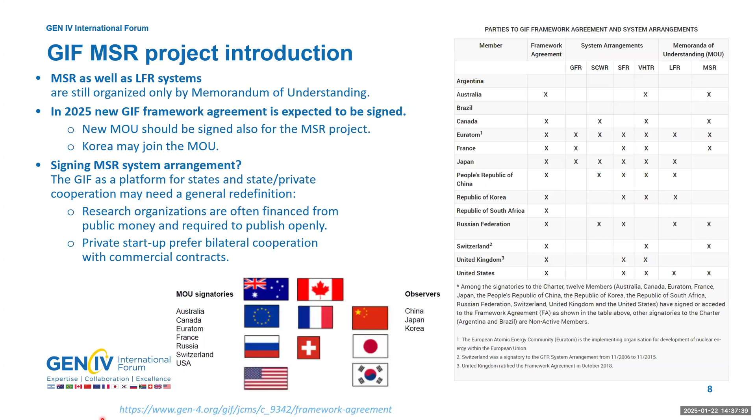Historically, we have discussed several times the option to sign an MSR system arrangement. So far it has failed for different reasons, and it's a question nowadays whether the GIF platform, as a state and state-private cooperation, may itself need redefinition in how it's organized, because there are research organizations financed from public money and required to publish openly, while private startups prefer bilateral cooperation with commercial contracts.

So GIF itself is looking a bit for its position, and MSR probably may wait for the decision to sign the system arrangement. The major activity of GIF is a biannual project meeting, typically held once online and once in person nowadays, but we are planning to switch back to both meetings in person.

We are contributing to the GIF annual report, and together with the PRPP working group, we recently published the MSR PRPP white paper about proliferation resistance and physical protection. Together with the risk and safety working group, we are trying to finish the MSR white paper on system safety assessment.

We are also representing the GIF MSR project at IAEA technical meetings. We don't have explicit interaction with NEA OECD, but as you may know, NEA acts as the Secretariat for Generation 4 International Forum, so it is also Secretariat for the GIF MSR project. I'd like to mention that the Working Party on Scientific Issues of Reactor Systems prepared the FHR benchmark, so if you're interested you can contact them. And the International Reactor Physics Experimental Evaluation Project included the MSRE case in the Handbook of Critical Experiments.

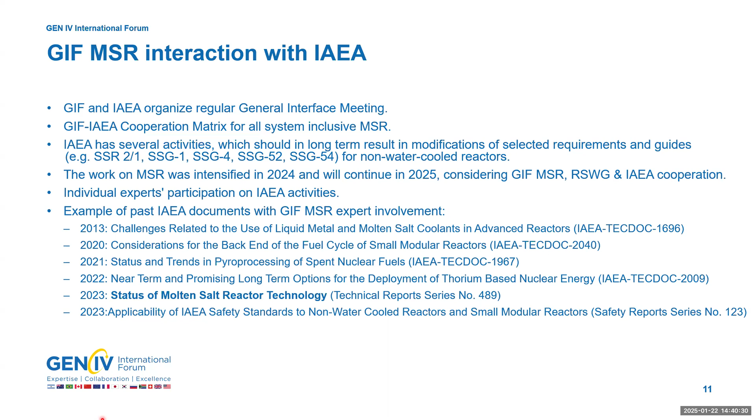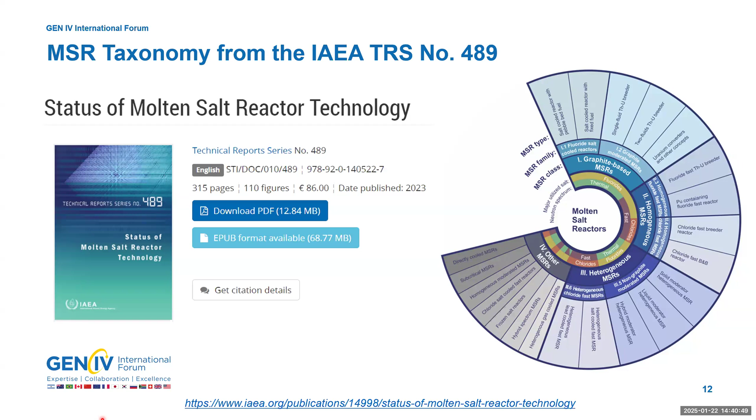This document includes the molten salt reactor taxonomy, which we've been developing at IAEA. I presented this taxonomy a bit in my previous webinar, but I'd like to go into details this time, focusing on the development of the taxonomy itself to justify which decisions we made at that time. So let me spend a few slides on that.

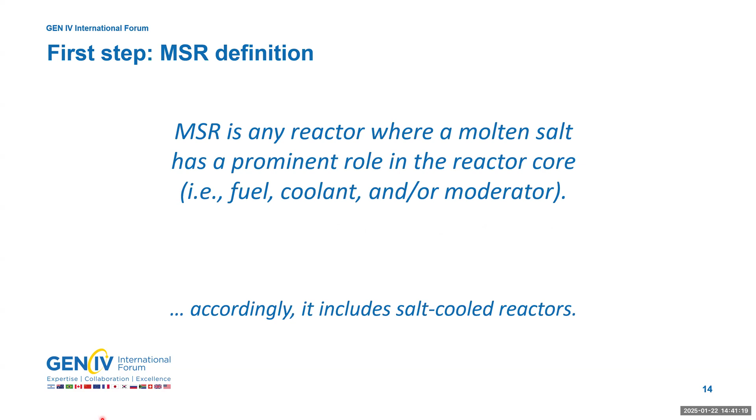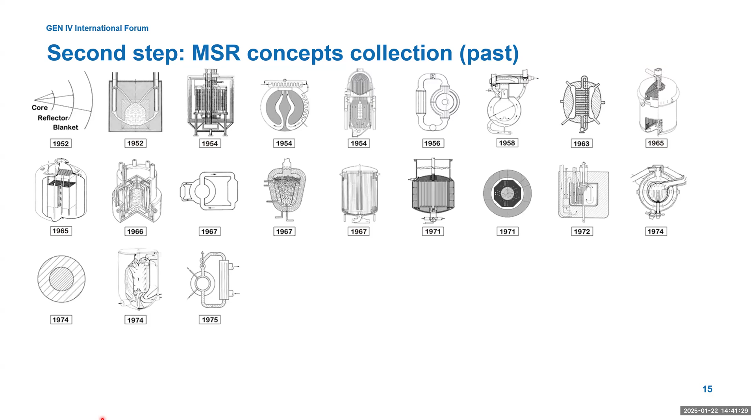The first step was the definition of MSR, chosen so that salt-cooled reactors were included in the taxonomy, because salt has a prominent role in their core. The second step was looking at MSR concepts from the past — we tried to collect all the possible concepts imaginable — and then we looked at more recent concepts, limited by the year 2020, since the report was released around that time.

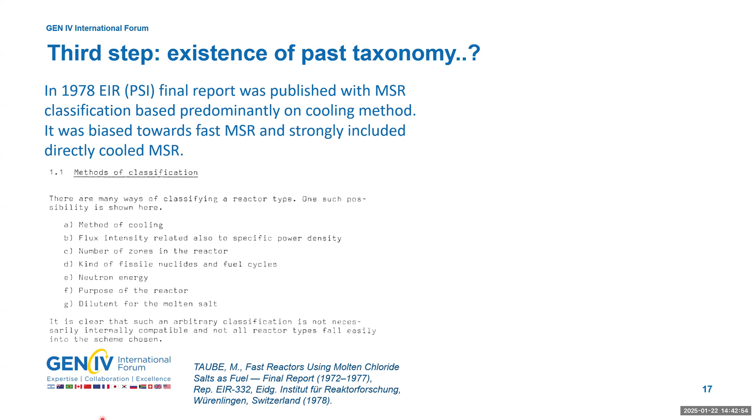The third step was looking at whether there was a past taxonomy, and indeed there was something you could call one: a method of classification from 1978 from the predecessor of PSI, Professor Taube and his team, who in the final report of their project tried to classify MSRs. The classification parameters included, first, the method of cooling, since at that time molten salt reactors with direct cooling — where, for instance, lead passes through the core, directly mixing with the salt and leaving again — were popular. Second was flux intensity or power, third was number of zones, fifth was neutron spectrum, and fissile nuclide and fuel salt type was not among the top three. So it was really based on cooling methods and number of zones.

For the IAEA taxonomy, the first meeting took place in 2016, quite some time ago. There are many parameters to consider, and thousands of options for how you could organize such a taxonomy, and even the one we selected isn't written in stone, so it can easily change in the future. But our first choice was that the taxonomy is limited to large reactors, because molten salt reactors provide such design freedom that you are, to a certain extent, limited only by heat exchange.

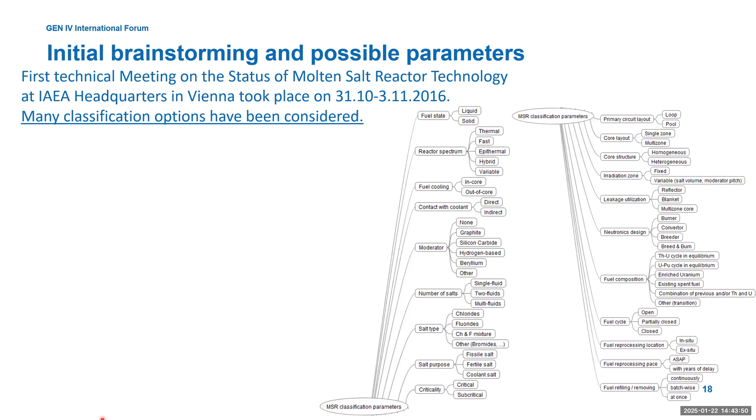And if you go to low powers, where even the heat exchange is not limiting, you can have thousands of designs. So the taxonomy was for large reactors, and the neutron spectrum, even though it's tempting, was not selected as the highest rank criteria. The fuel cycle type or salt type itself was also not selected. So finally, the number of major materials in the reactor core was selected as the highest rank criteria.

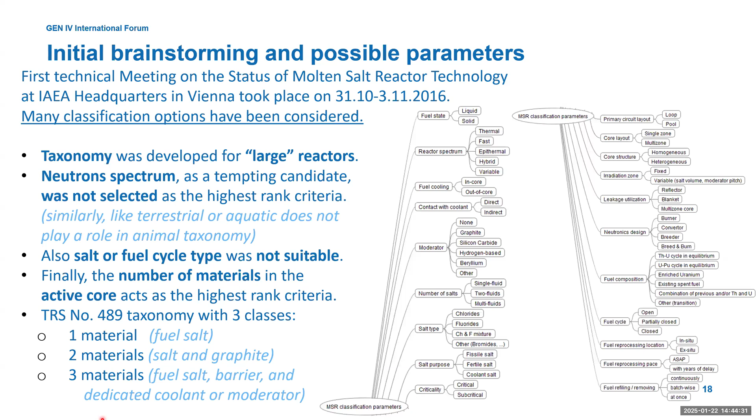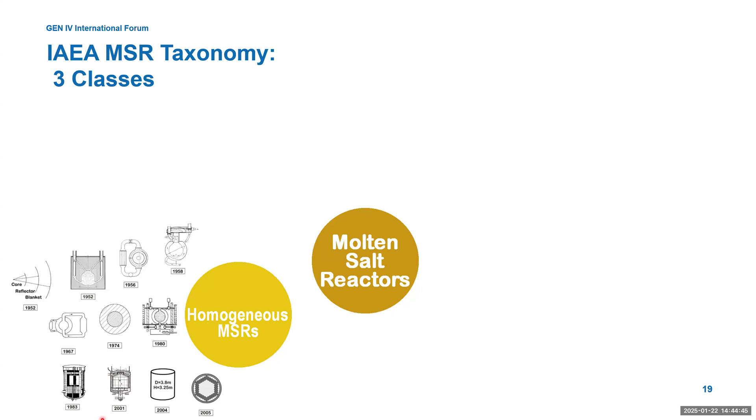So you have a class with one material in the core, which is the fuel salt; with two materials, which is salt and graphite; and three materials: fuel salt, a barrier material, and then a dedicated coolant or moderator. Molten salt reactors can be divided into homogeneous MSRs, where typically chloride and fluoride fast reactors belong, graphite-based MSRs, where graphite is used in the core, and heterogeneous MSRs, where a structural material separates fuel salt from either a dedicated coolant or solid or liquid moderator.

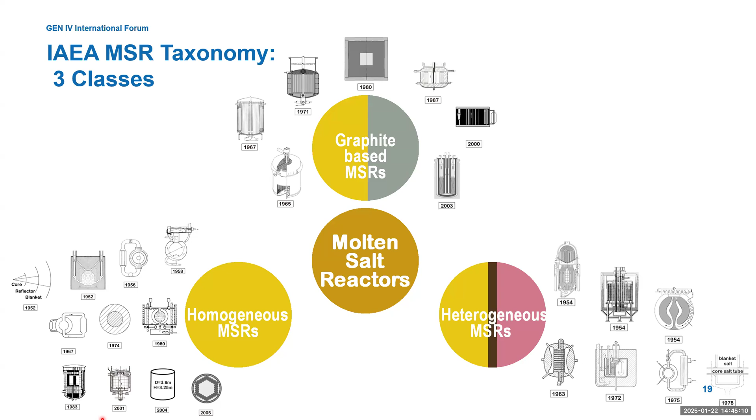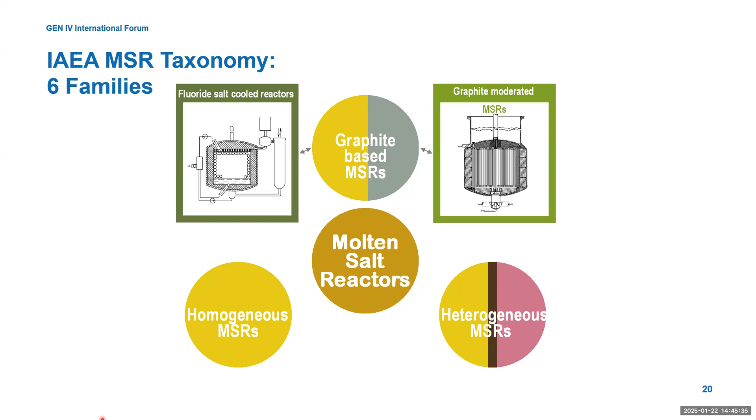These three classes can be further subdivided. For graphite-based MSRs, it is into fluoride salt cooled reactors, where the salt has only a cooling function and the fuel is embedded in TRISO particles in the graphite, and graphite moderated MSRs, where the graphite acts as a moderator and the fuel is dissolved in the salt. Homogeneous MSRs can be divided into fluoride fast MSRs and chloride fast MSRs, and heterogeneous MSRs into non-graphite moderated MSRs and heterogeneous chloride fast MSRs.

In the GIF MSR project, we adopted the IAEA taxonomy, and here you can see the graphical form we use in the GIF annual report, and this is a list of companies or concepts provided by the GIF MSR project partners. So it's not an exhaustive list — some concepts may be missing, but it is what the partners provided.

So this was a relatively short introduction of the decisions we made when creating the taxonomy. Now I would like to have a look at the history of MSR and comment a little bit on the evolution of ideas and concepts.

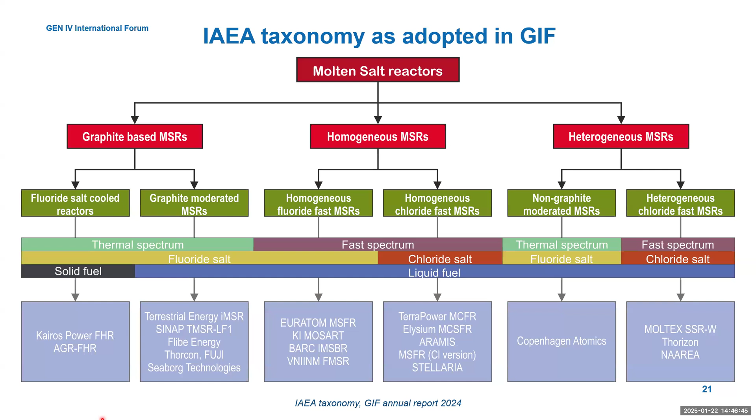As you may know, it all started with the aircraft nuclear propulsion program. It was the first big program dedicated to MSR, not only MSR, but quite intensively to MSR, and it was meant for aircraft propulsion. Therefore, fast reactors have been excluded. And since it required high temperature, water as a coolant was also excluded.

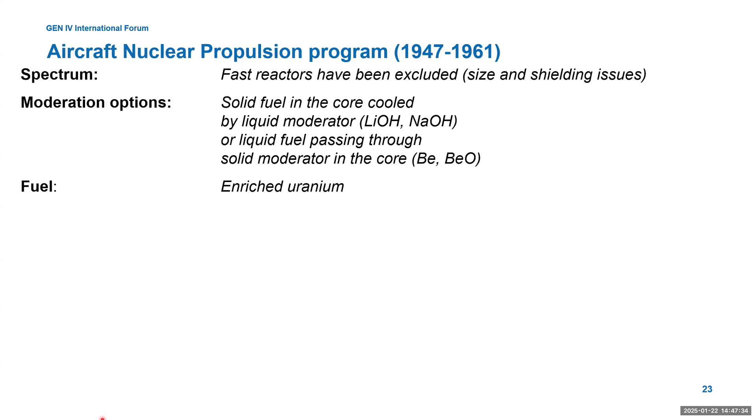So there were basically two options: solid fuel cooled by liquid moderator at high temperature, let's say lithium or sodium hydroxide, or liquid fuel passing through a solid moderator, such as beryllium or beryllium oxide. It was relying on enriched uranium, and Oak Ridge, as the project's main institution, looked at many, or practically all, possible uranium compounds to see if they were useful for the reactor.

And ended up with uranium fluoride diluted in fluoride carrier salt. The issues they had at that time are very similar to the issues we have now with engineering: minimizing the melting temperature of the salt, compatibility of the salt with other materials, and minimizing the core and shielding size and weight.

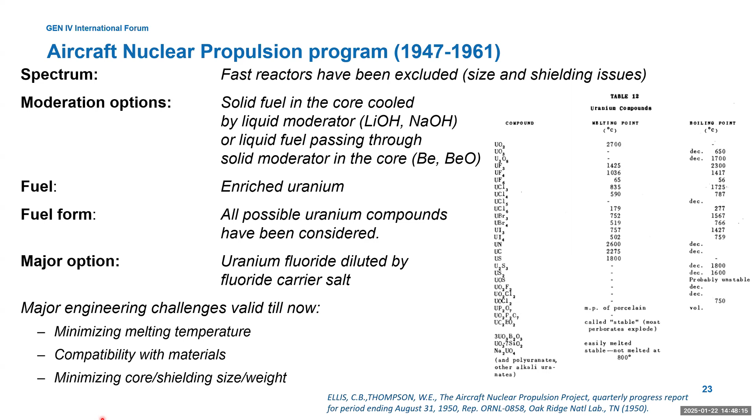So I will now go through the decades of evolution, starting with the 1950s — the early Oak Ridge MSR pioneering time. There was an ongoing military project, but in parallel there were also students looking at fast chloride and fluoride breeders. They were probably faster in publishing because they likely had deadlines and wanted to be ready with their studies.

So in 1952, two reports were published — one for the chloride fast MSR and another for the fluoride fast MSR. Already from the first report, it is obvious that chloride fast reactors have an issue with neutron leakage, which needed to be handled with a reflector and blanket. For the fluoride fast breeder, you can see it used graphite as a reflector, and there was beryllium in the salt, so it was not really a fast reactor, and the breeding performance was so weak that this branch was kind of abandoned to a certain extent.

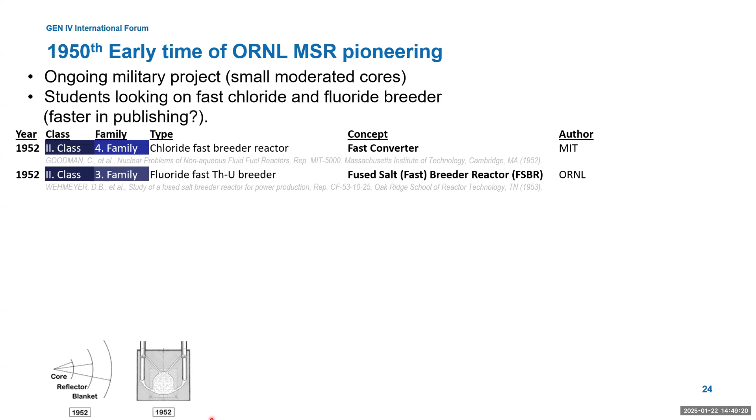In 1954, there was a report which included the ARE, the famous experiment with beryllium oxide and salt. There was the Fireball, a kind of conceptual idea of how the aircraft propulsion could look, but there was also a heavy water moderated concept, an ART concept variation.

Later in the 50s, two other designs for chloride and fluoride fast reactors were published. They were a little more mature compared to the initial ones, and especially for the fluoride fast reactor, you can see that the graphite reflector was abandoned, but there was still beryllium in the fuel salt.

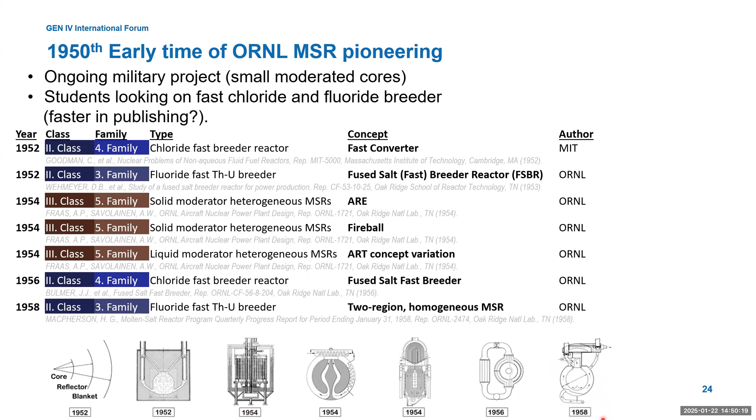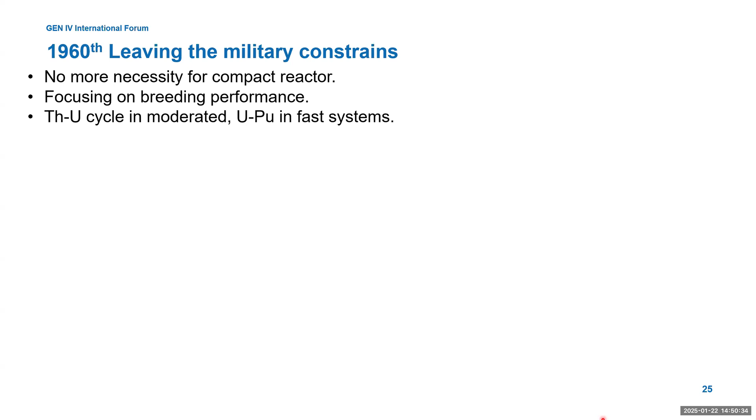So still the spectrum was quite soft, and the breeding performance was not really breathtaking. In the 60s, Oak Ridge was leaving the military constraints, so there was no more necessity for a compact reactor. And there were two branches: thorium breeding cycle in moderated MSR, and uranium-plutonium cycle in fast systems. So here you can already see quite a mixture of different concepts.

In 1963, the first heterogeneous chloride fast reactor was proposed, with the idea that if you separate the fuel from the coolant, you don't need to extensively pump the fuel.

In the same year, in Oak Ridge, the two-fluids MSBR version was proposed. This was later abandoned because of the difficulty of separating the two fluids.

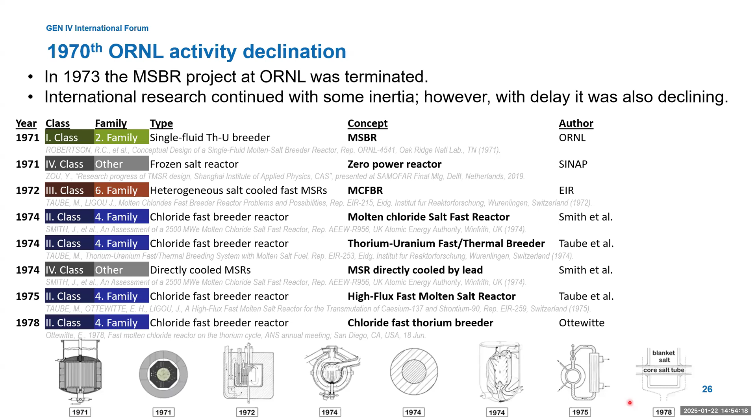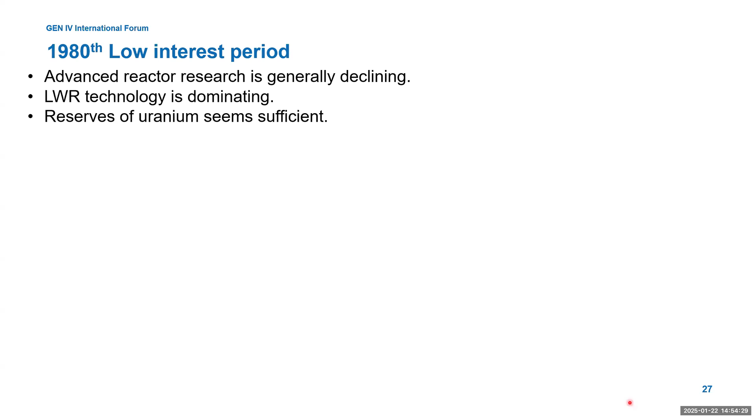Unfortunately, in the 80s, it was a low interest period. LWR technology was dominating, and it seemed that uranium reserves were sufficient. So those are like last-of-a-kind designs. In 1980, the last design from Switzerland was a chloride fast reactor which had a particularly liquid salt reflector.

In Oak Ridge, they tried to propose the denaturated MSR, DMSR, with the idea that by giving up the breeding, you can change the fuel cycle, denaturate it so that you avoid proliferation risk, and make it so big that the graphite lifetime would be 30 years, similar to the lifetime of the vessel.

But it was also a kind of last-of-a-kind, and research was stopped in Oak Ridge after. 1983, the Russians proposed a salt-cooled pebble bed reactor, and in the same year in France there was probably the last directly cooled MSR proposal. The Japanese were holding the flag of graphite-moderated MSRs in the late 80s with the Fuji concept.

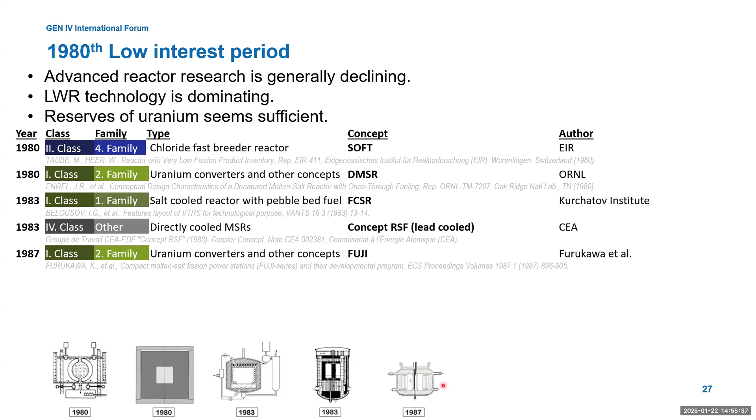In the 90s, generally it was a dark period for nuclear energy, and it seemed at the time that ADS, accelerator driven system, was the light at the end of the tunnel. So there were also subcritical molten salt reactors proposed. Generally, the accelerator is very useful if you want to burn minor actinides, and if your core is loaded only with minor actinides, you can have a problem with your Doppler coefficient, and you may need an external neutron source provided by the accelerator.

But molten salt reactors can probably compensate for the weak Doppler through the liquid fuel expansion coefficient, so they don't need this accelerator. Furthermore, ADS is good for a small dedicated burner, but it's not really scalable for energy production, because if you scaled it to big powers or many units, you would really need many large accelerators.

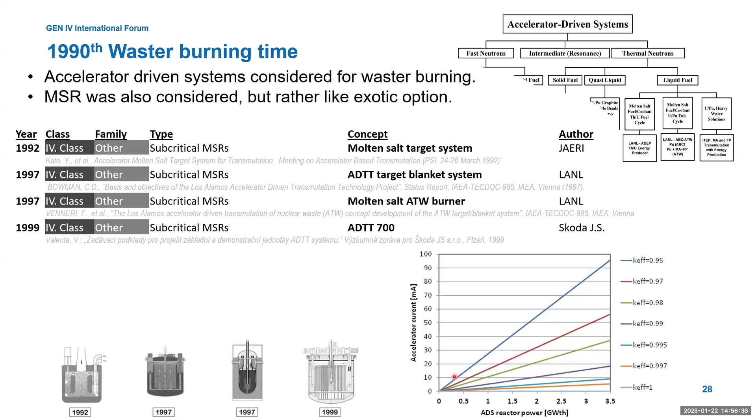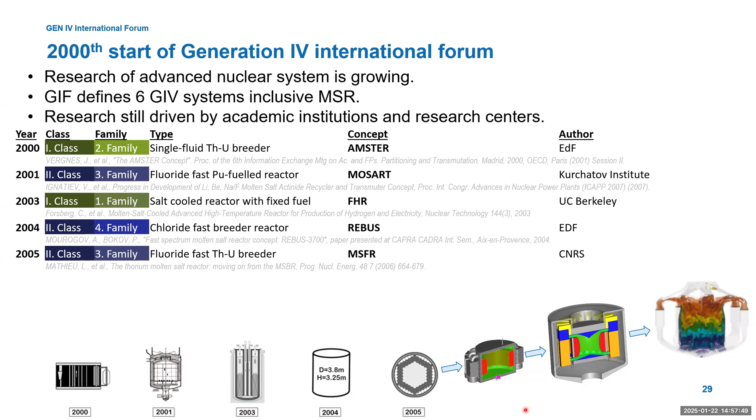What I would like to illustrate here is the evolution of the concept, because probably all of the concepts being developed nowadays undergo such an evolution, but this is not public, so we don't see it. For the MSFR, however, it is well documented how it was evolving.

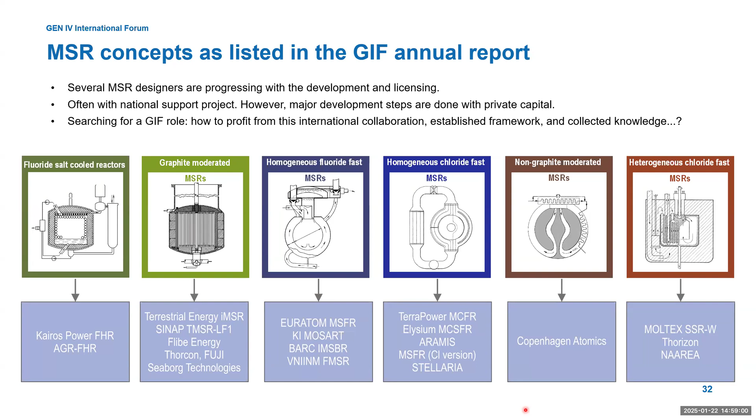Now I would like to open the third part of this presentation, speaking about MSR issues in a nutshell. So first of all, the basic features.

For homogeneous MSRs, you use fluoride or chloride salt, which acts also as a coolant, and it's a fast spectrum. In case of chlorides, the spectrum is very hard, and it's very good for the uranium-plutonium cycle, which can profit from a hard spectrum. At the same time, it is transparent for neutrons, so it can be quite leaky, and you need to handle the leakage somehow.

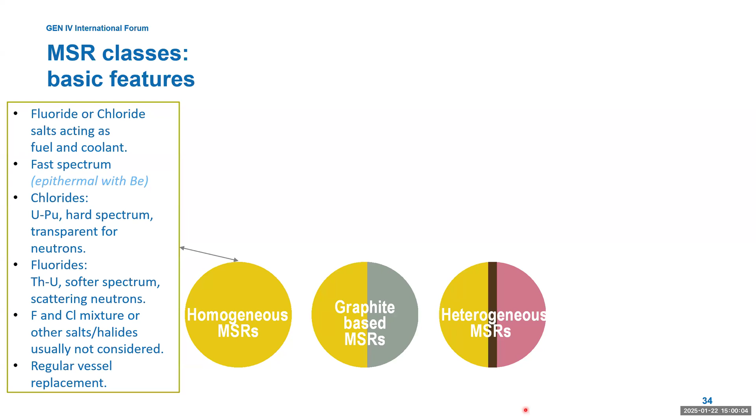You need to have big reactors, or a reflector or blanket. On the other hand, fluorides provide a much softer spectrum, so it's much more suitable for the thorium-uranium cycle, and it can be designed as a more compact system. What you need to do for these reactors is probably replace the vessel regularly, because it is really irradiated—it's very near to the reactor core because it's forming the reactor core.

For graphite-based MSRs, exclusively fluoride salts are used because chlorides would have a high neutron capture. There is a possibility of a closed thorium-uranium cycle, but it would be demanding—you would need fast fuel cleaning in that case. So typically a low enriched uranium fuel cycle is foreseen.

In case of solid fuel, TRISO particles embedded in the graphite matrix, you need moderating salts like lithium fluoride or beryllium difluoride, because only moderating salts provide a negative coolant density effect. And you need to replace the graphite regularly in these reactors.

In heterogeneous MSRs, you have the separating material, and it's kind of eating neutrons—parasitic neutron capture by that material. The choice of this material will determine your neutronic performance, so its breeding capability.

Fluoride salts are used for moderated systems, because you don't want to use chlorides in a thermal spectrum. On the other hand, chloride salts are used in systems with a dedicated coolant, because you need some reactivity excess for the dedicated coolant and the material of choice. Again here, you need regular replacement of the structural material.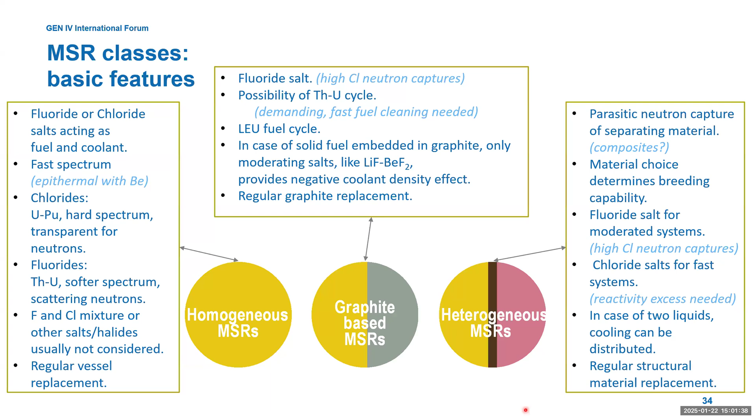Now, all these reactors have one thing in common: the reasonable temperature window for operation, because you have, on one hand, salt melting temperature, and on the other hand, structural material failure temperature or integrity. So you typically have eutectic mixtures of carrier salts and actinide salts so that you lower the melting temperature.

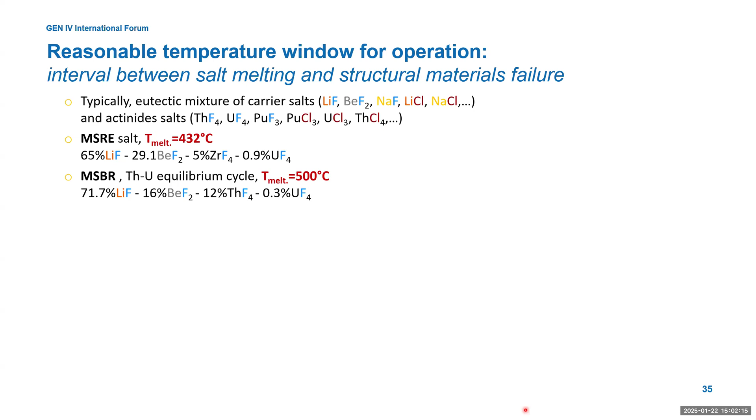The molten salt reactor experiment, for instance, was operated with a salt where the melting temperature was 430 degrees. The MSBR salt with thorium already had a melting temperature around 500 degrees C, so it's quite some step up.

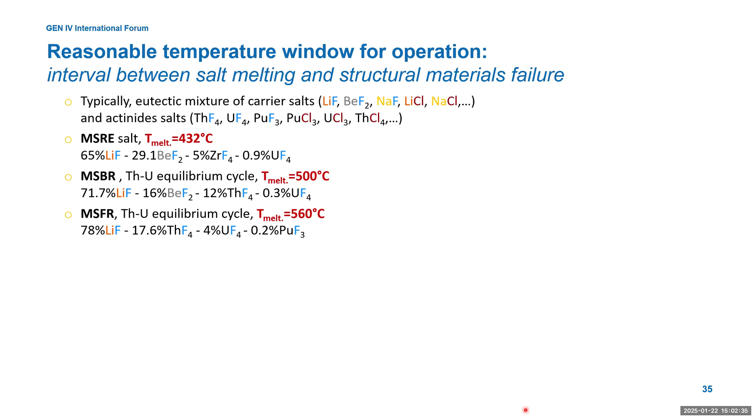MSFR is foreseen to operate in the thorium-uranium fuel cycle, and it has a fast spectrum. So beryllium was removed from the salt, and the melting temperature increased again by 60 degrees C, to 560. If you would like to start this reactor just with plutonium, your melting temperature would be sky-high. Consider that the structural materials probably can be operated up to 700, 750 degrees C.

For chlorides, molten chloride fast reactor, it is back to 560 degrees C. And there is a salt, for instance with thorium and plutonium, which is probably good for waste burning, which has again quite low temperature like we had at MSRE time.

In general, the solubility limits and actinide density are competing with melting temperature, and you need to find an optimum or compromise between these, and also consider the structural materials you are using, and safety features and so on. Similarly, like with temperature window, there is a redox potential window, and there is also a trade-off of salt stability and structural materials corrosion.

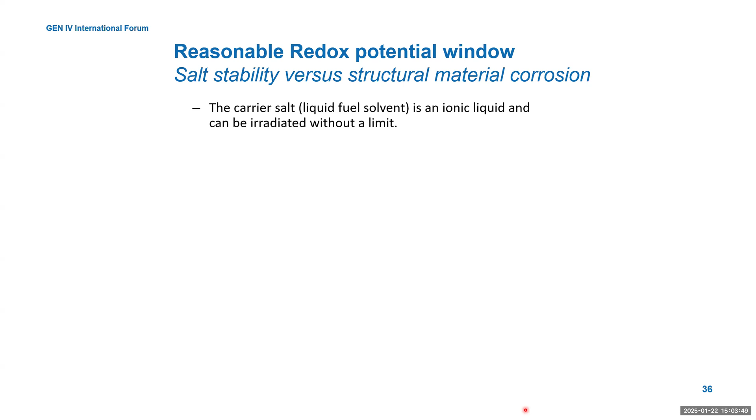So the salt itself is an ionic liquid and can be irradiated for infinite time. And no matter the fuel cycle type, it is always good to keep the actinides as long as possible in the reactor. So what you want to remove is actually the fission products, but they don't want to be removed. They are typically the last one to leave.

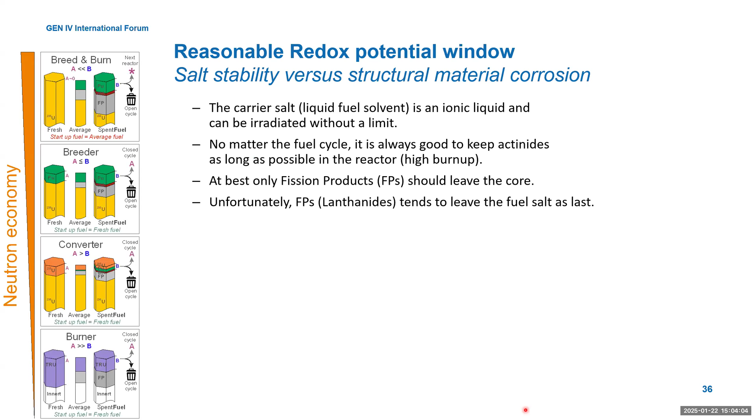And you need to control the salt. You need to control the redox. You need to remove impurities so that you are in a safe redox potential window.

If you would be on the oxidative part, you see that the corrosion or oxidation of the structural material can be quite strong. If you will be on the reductive part, you may have an issue of precipitation of actinides and other elements. So according to your system, your structural material, and the salt and fuel cycle you select, you need to find your redox potential window for operation.

If you would then control this redox, and keep the salt clean, not necessarily are there big issues with corrosion. So there is a temperature window, there is a redox potential window, but you should also consider the fuel cycle type and combine them all together because they should fit.

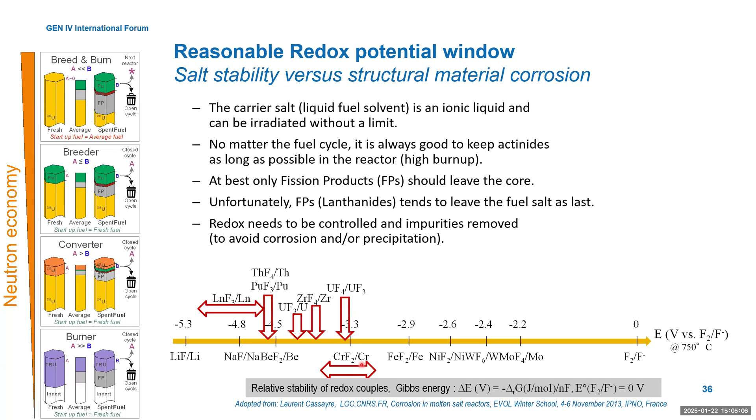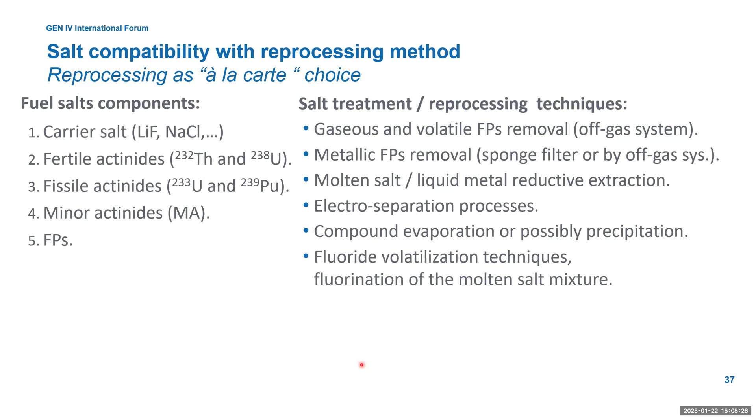So from that perspective, the salt has 5 components, and it is typically only the 5th component, the fission products, which you need to remove. And for that, you can use several different methods. Sometimes you need to use several different methods to get to the fission products and remove them. And you can apply these methods in many different modes, so altogether it provides many different variations.

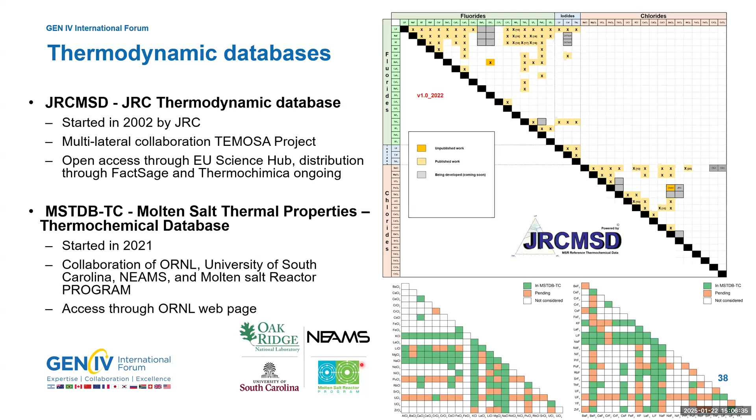The last slide of this part, I wanted to speak a little bit about safety and licensing on a very high level. And I would like to express a rather personal perspective here, that nowadays the light water reactors are based, the core of light water reactors is based on assemblies and pins.

And the core does three major functions. It is the location of the first confinement barrier, it is the location of primary heat exchange, and it is also shaping the neutron flux area. So in case of core damage, you are losing these three functions, and it is considered a severe accident. It's a safety threat, it is irreversible, and it means facility loss.

If you look at MSR, in some MSRs, the core is shaped by solid moderator or just by the vessel. So the liquid fuel relocation from the core does not always mean severe accident. And core damage has thus completely different importance in MSR. Unfortunately, if you look at the regulations, they are not necessarily prepared for MSR. So therefore, there are activities around the globe. Let's name in particular the NRC activity for that. And the IAEA is also trying to do that, but MSR is really tough in that sense.

In the past, I was also showing these figures illustrating the barriers, but I would not go into detail here. I would just mention that even though traditionally we speak about three barriers, when you do the probabilistic safety assessment, you don't do it for three barriers. You have probabilistic safety assessment for core damage frequency, and then the next one is for the barrier, for the containment failure. So you do only two of them. So let's see if you will need two for MSR or if you will make only one, but not necessarily the three barriers or the first two barriers for LWR are fully independent.

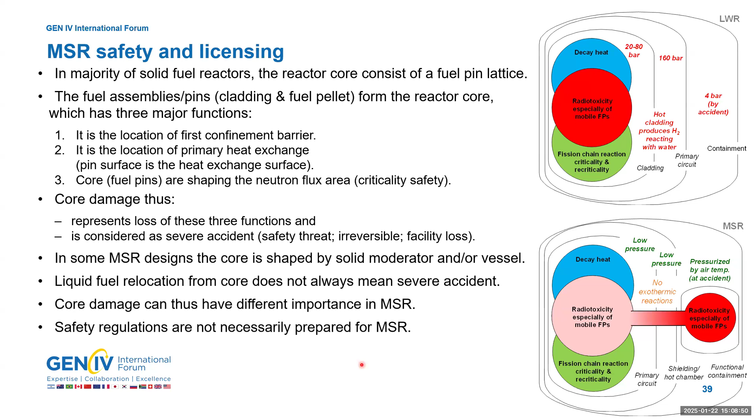Okay, this was the first half, the introductory part, and now I would like to switch to presenting the activities of GIF MSR partners. So as I said, we have 7 signatories and 3 observers. Let me start with Australia. So there are 4 areas of interest in Australia.

On one hand, they are looking at radiation damage of structural nickel alloys. On the other hand, they are studying high temperature creep and molten salt corrosion of structural alloys. They also develop Synroc-type waste forms for fluoride salt immobilization, and cooperate with several startups on testing and multi-scale modeling of graphite and carbon-carbon composites.

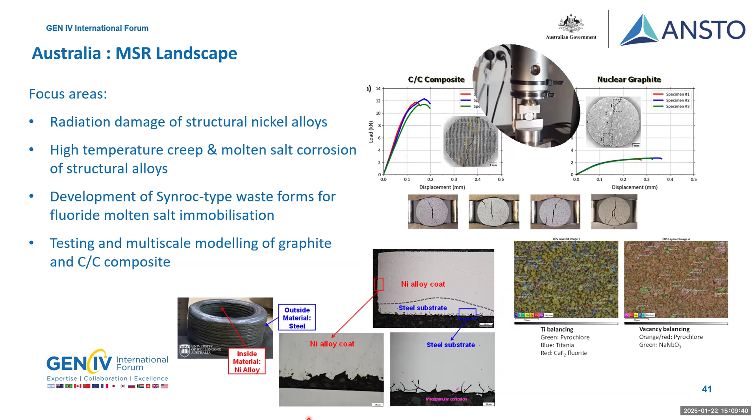If I switch now to Canada, the landscape of Canada has 3 major streams. The first are the big energetic reactors in operation. The second are advanced reactors, where in particular you can see Moltex and Terrestrial Energy MSR companies. And in the third stream, there are off-grid micro reactors with small power.

I'm not sure that there is MSR there. In my personal opinion, MSR is not really good for micro reactors because the salt needs some controls, redox control, off-gas handling and so on. So not necessarily MSR is the best for micro reactors. I would rather go for bigger reactors.

If I go to the actual work or topics addressed in Canada, for the fuel and coolant salt properties, they are performing some DSC measurements, molecular dynamic studies, and measuring thermophysical properties of selected molten salts. From materials and components, corrosion experiments of SS316, developing reference electrodes, exploring methods for redox potential control, and investigating the impact of fission products on the redox potential.

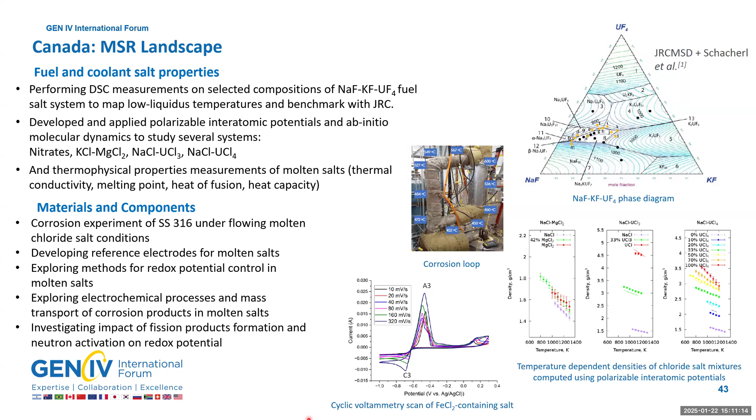Now, since Moltex is kind of active in Canada, I would like to show a slide of the Moltex company here. Say 2-3 sentences about the concept itself: it's a stable salt reactor, a heterogeneous MSR where the salt is not circulating, it's sealed in pins, and there is a dedicated coolant. I'm not sure if it is also chloride salt, but it profits from the advantage that you don't need to pump the fuel salt. The fuel is liquid MSR, so it's salt, but at the same time it's sealed, so it has some issues like solid fuel reactors. So you have assemblies, you may need to reshuffle them and care about power peaking more than in solid fuel reactors.

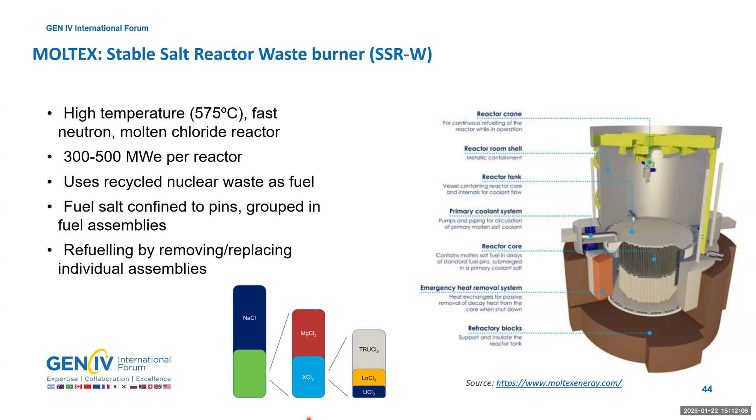The next GIF MSR project partner is Euratom. Traditionally, Euratom has been financing molten salt reactor projects since 2001, and there is a nearly uninterrupted series of these projects. At the end of 2023, the Samosafer project finished.

Mimosa was launched in parallel for kind of multi-recycling of spent nuclear fuel in molten salt. And Endurance, like the continuation of the series of projects, was launched in fall last year. I think all major European partners are involved, including the startups.

Speaking about the startups or companies, I can name 4 for Euratom if I exclude France. It's 2 Danish startups, Copenhagen Atomics and Seaborg Technologies. One with the idea to have a small reactor in a transport container, second with the idea to have a power barge, a reactor on a barge. Dual Fluid Reactor used to be an MSR startup, using actinide chlorides without any carrier salt as fuel. You can imagine the melting temperature was very high, but they recently switched from salt to liquid metal fuel alloy.

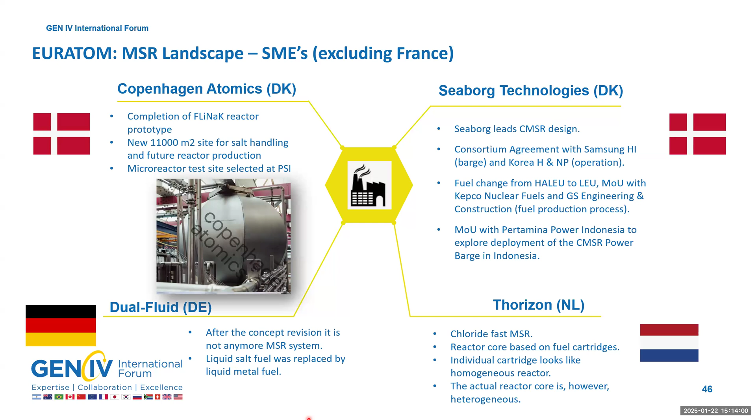Euratom as such is directly financing the joint research centers, and especially JRC Karlsruhe is a competence center for MSR and fuel properties. So they can do everything you can imagine, from synthesis, thermophysical properties measurement, irradiation, reactor safety, up to the thermodynamic database I already mentioned.

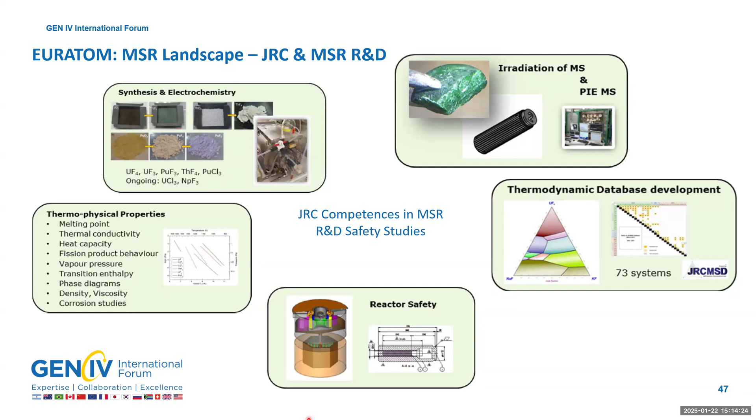If I go to the highlights, Euratom organized last year a workshop dedicated to standardization, putting science into standards for MSR. Then there are several highlights from JRC and their involvement in European projects, Samosafer and Mimosa, and also participation in a high-level IAEA meeting, and as I already said several times, extension of the JRC thermodynamic database in collaboration with partners.

But Euratom is also represented by individual countries, so I have a very swift presentation of the activities, starting with Czechia. At CV Řež, nearby Prague, they were measuring neutronic properties of lithium fluoride, beryllium difluoride in their LR0 reactor. Nowadays, in the frame of the Mimosa project, they are looking at fluorides, and they are also participating in Endurance.

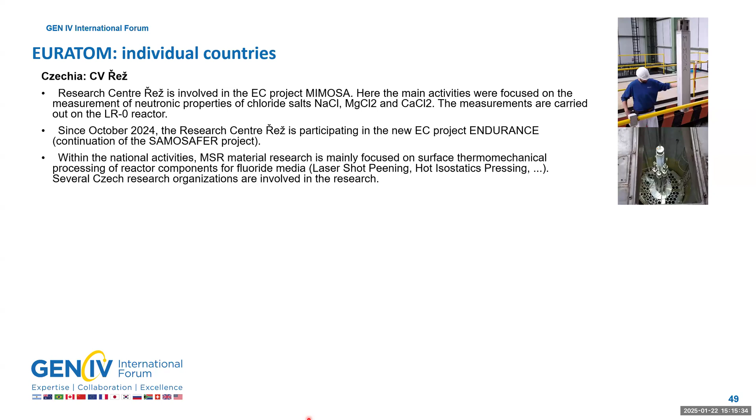In the Netherlands, NRG, here I would name the Saga 2 and Saga 3 experiments with gamma irradiation of the granulated salt. They also did Salient experiments, and Salient 3 is scheduled for summer of this year.

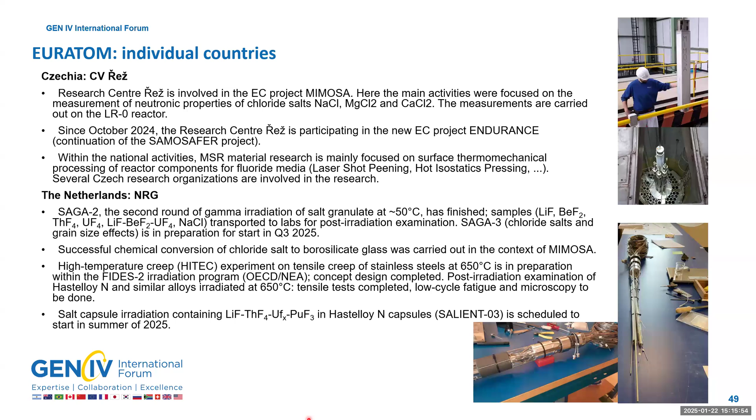I would also explicitly name Italy, especially Polimi, where Stefano Lorenzi from Polimi is the project coordinator of Endurance. They are historically good in modeling and thermohydraulics of molten salt reactors. They also had the Dynasty facility.

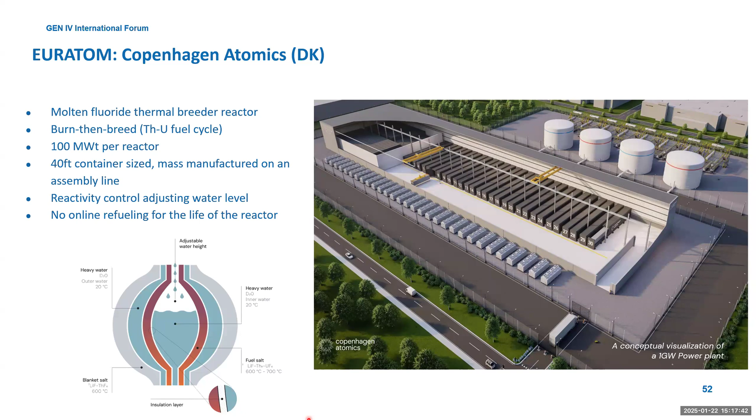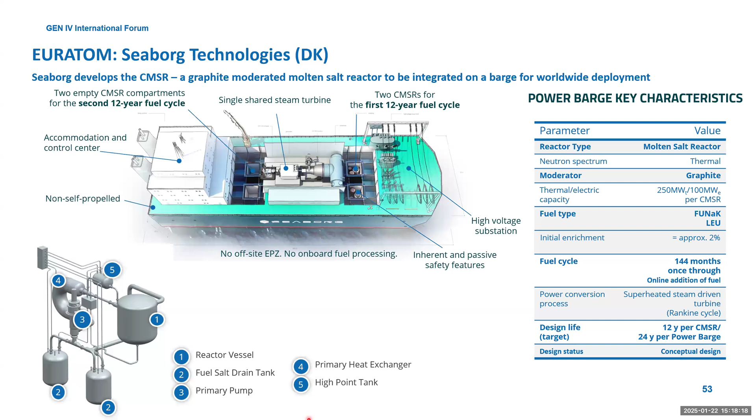Another startup is Seaborg Technologies with their power barge. From the very beginning they are pursuing the idea that you put the reactor on a barge, fabricate it at a given spot, and transport it where it is needed. It is based on the graphite moderated MSBR type, but they don't plan to breed, so they don't need lithium beryllium with enriched lithium salts. The foreseen initial enrichment is approximately 2% for uranium.

The third startup is Thorizon. Thorizon is also challenging the taxonomy from a certain perspective, because the core is composed of cartridges, but an individual cartridge is quite large and can be considered a homogeneous fast reactor. But together, these cartridges form a heterogeneous core. It is really interesting from a classification perspective.

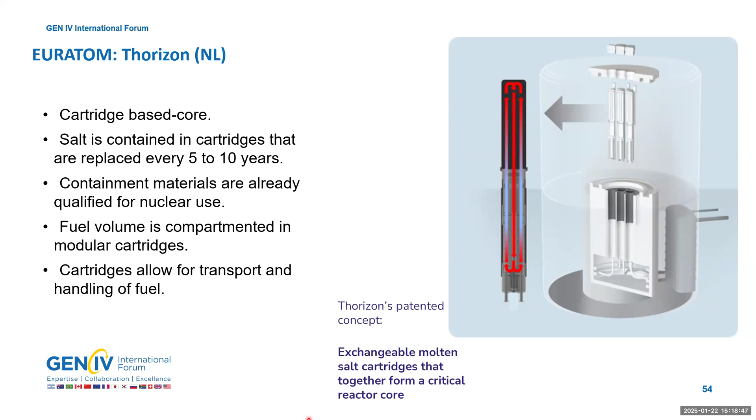And there are French startups: NAAREA, which is a fast chloride micro MSR using actinides, and Stellaria, which is a small to big MSR relying on a homogeneous chloride fast reactor.

The major player is CEA, as a national research center, and they do similar activities to national research centers in the US - so code development and simulations in all different fields. There are design activities, let's explicitly name the Aramis concept. They are also involved in national and European projects, and they also do chemistry: synthesis, corrosion, material properties.

And they are supporting French startups through the France 2030 call. In particular, I would name here the ISAC project, with design and simulation activities for the Aramis concept. As you can see, there is a quite long list of PhDs which are either ongoing or recently finished in several different locations.

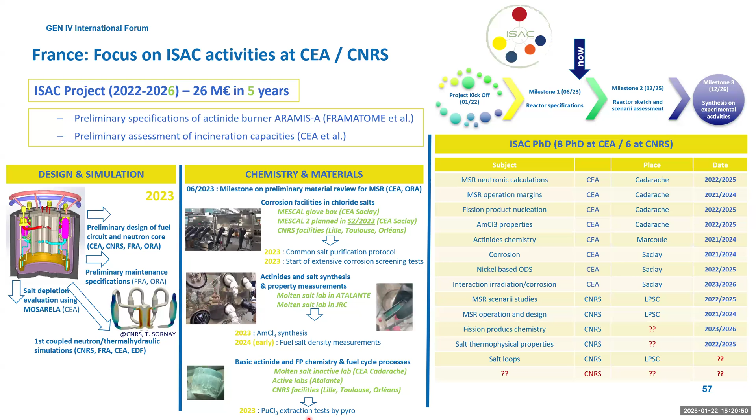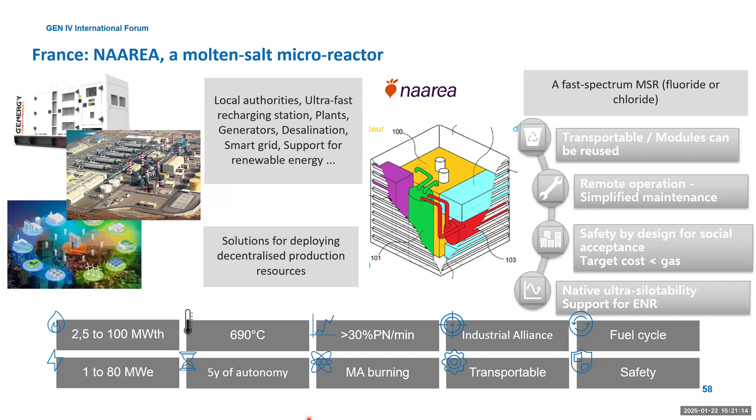So speaking about French startups, there is NAAREA, as I already mentioned - a micro reactor, fluoride fast reactor, chloride fuel, probably chloride coolant, but they also admit fluorides in this slide. Low power, and probably dedicated to waste burning, because the core is small for breeding.

Stellaria is a homogeneous chloride fast MSR, so the size probably may allow breeding. I'm not sure about breed and burn, but if they are really good at utilizing the neutron leakage, it's probably possible. What is really special here is that they don't use pumps - they rely on natural circulation.

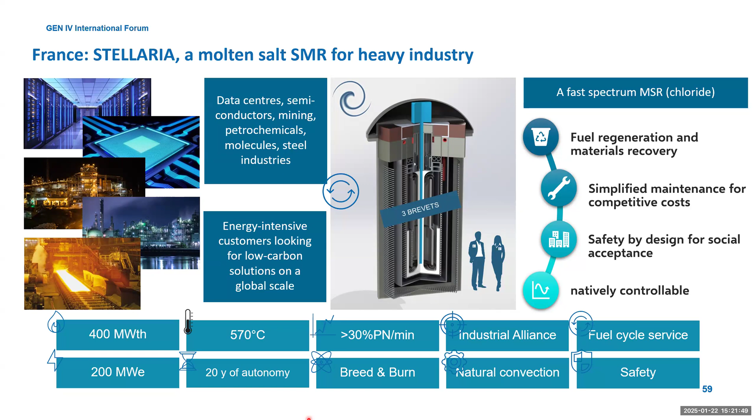Yeah, and that's it for France. The next country in the list is Russia, and they are developing the MOSART burner since 2001, so quite some time. What you can see now is that they are proceeding, and Rosatom as a vendor is preparing.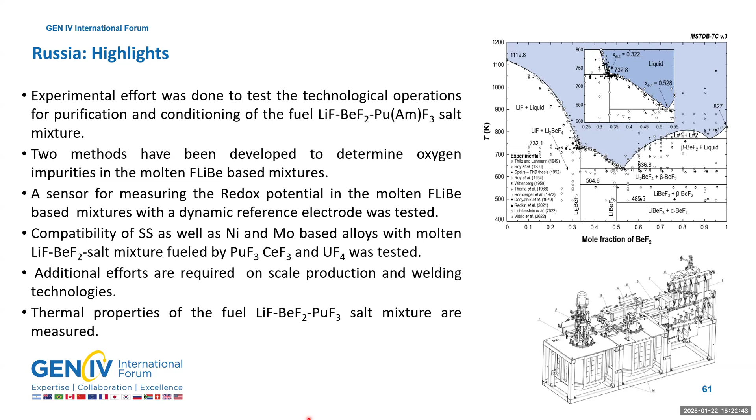Okay, I have Switzerland now in the list. Switzerland is a dwarf - we are here in Switzerland relying more or less on students in our MSR project, and the major function is education and monitoring. There is no really strong MSR system preference. We are focusing on safety and sustainability.

As a highlight, what I would name here is the participation - we are participating in Endurance as a third country with substantial contribution, I would say. And PSI and Copenhagen Atomic signed a large-scale experiment collaboration agreement. I think the major milestone ahead is trying to license it, and then we can proceed. I'm not sure about 2026 - 2027 would be also great. Let's see how it will go, but it's exciting, I must say.

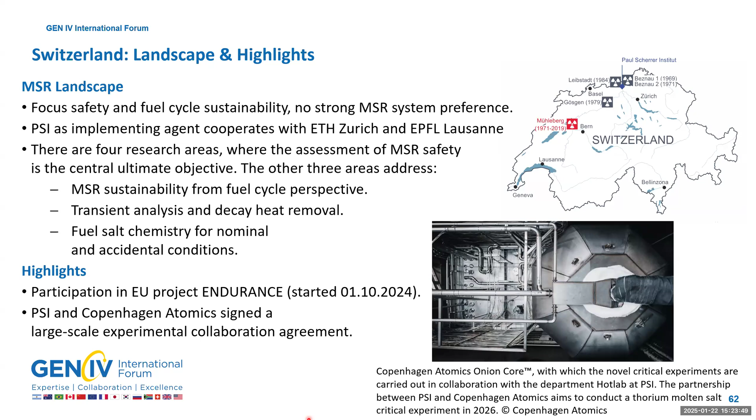If I should go in details in the USA landscape, the Department of Energy, especially the Office of Nuclear Energy, they remain focused on enabling MSR industry and building the supporting infrastructure. The largest fraction goes through the Advanced Reactor Demonstration Program, ARDP. So DOE NE continues to support MSR via the MSR Technical Campaign, Advanced Fuel Campaign, Nuclear Energy Advanced Modeling and Simulation (NEAMS), Nuclear Energy University Program (NEUP), and through the Gateway for Accelerated Innovation in Nuclear (GAIN) vouchers.

There is also activity in the regulatory commission developing a technology-neutral, performance-based, risk-informed regulatory framework.

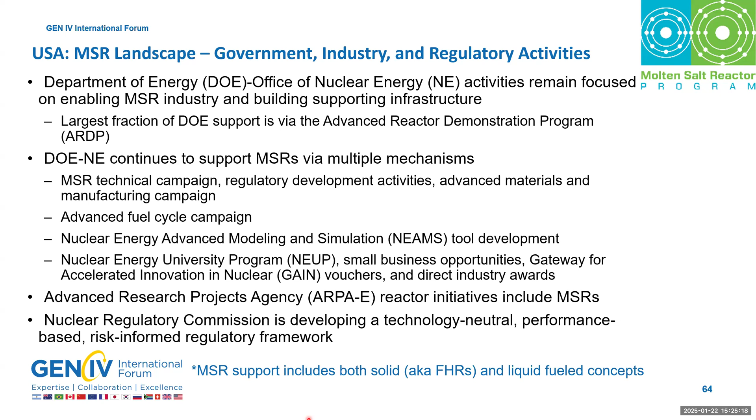Looking in details in the MSR landscape, the MSR campaign is covering more or less all the fields you would expect. So it's the salt chemistry - thermophysical, thermochemical properties, experimental and theoretical. It's technology development focusing on off-gas management, radionuclide release, monitoring and sensors. It includes modeling and simulation, but also irradiation, advanced material testing, surveillance technology, interaction between graphite and salt, structural materials and salt, and also looking at the separation of radioisotopes, which may be of interest for the MSR community.

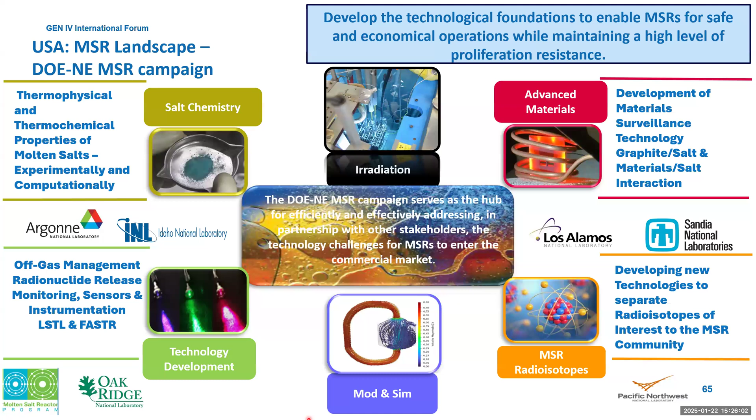One of the highlights is the development of the database, and many companies are pursuing deployment in the 2020s and early 30s, sorry.

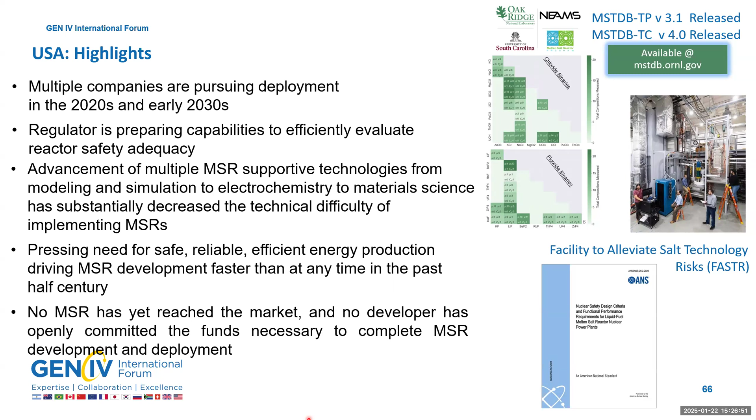Saying that, I can say that there are some big milestones already achieved. So for instance, for Kairos Power, let's say that they broke ground on the salt production facility to produce high purity molten salt coolants in October 24. And also in October 24, they signed an agreement with Google, and it was medially well covered, and it raised, I would say, a big wave of interest, also from the general public.

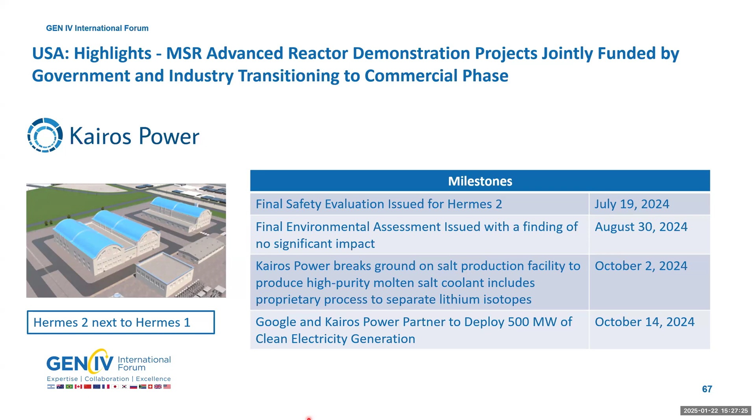Another example is the collaboration with TerraPower and Southern Company, where there was this integrated effects test with more than 250 documented lessons learned. And nowadays they are developing this Molten Chloride Reactor Experiment, MCRE, which should hopefully operate soon.

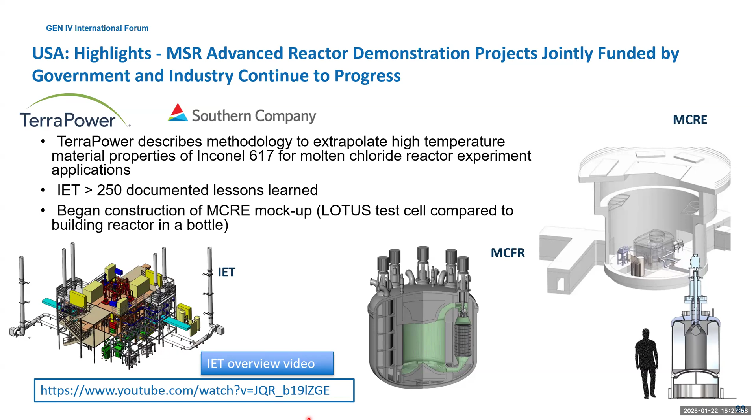And another prominent example is the activity at Abilene Christian University. So they already finished construction of the building, and Natura Resources received a construction permit for the MSR1 at Abilene Christian University in September last year. So let's see how fast there will be progress.

There is also one highlight related to Terrestrial Energy, because this company redomiciled to the USA, and on the picture you can see the layout of the dual IMSR facility. The idea of this company is quite simple: to take the graphite moderated MSR as it was developed in Oak Ridge, and try to do as fast as possible the minor modifications to it and put it on the market. As trivial as it may sound, it is still quite complicated, but crossing fingers for that.

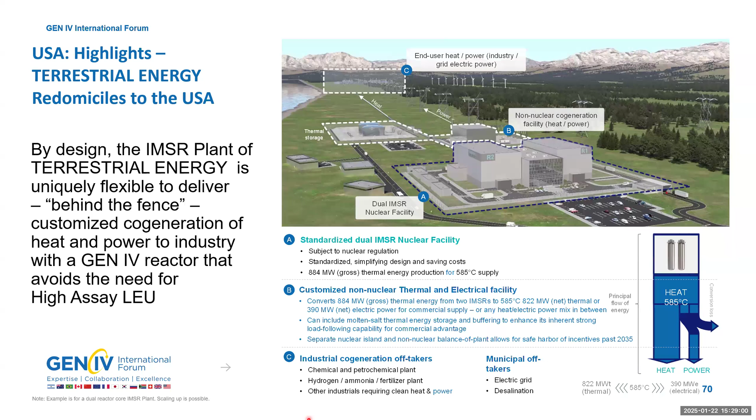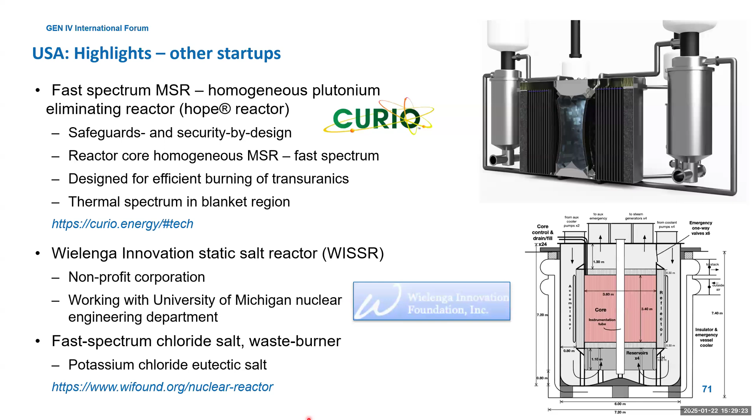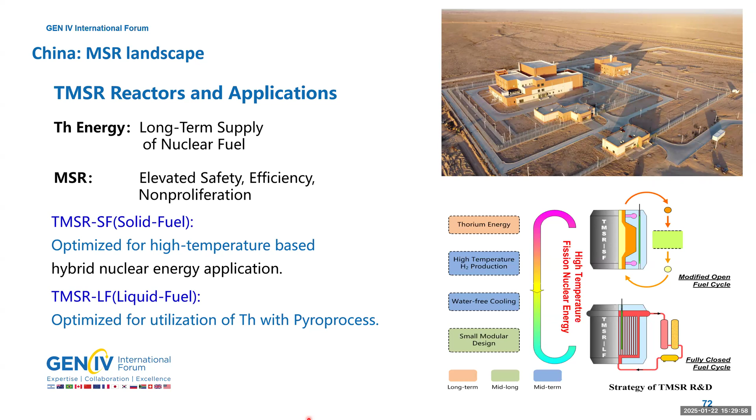One is a branch with solid fuel, TMSR SF, and a branch with liquid fuel, TMSR LF. In the liquid fuel branch, they were for many years planning a test reactor. I have the honor to announce that this test reactor is not only in operation, but was already operated for quite a few days on full power.

If I start from the beginning, the building started in 2018, and in fall 2023 criticality was reached. In June 2024, they reached full design power of 2 megawatts. In October last year, they operated the reactor for 10 days with thorium fuel, and they could detect protactinium-233. That's very great news.

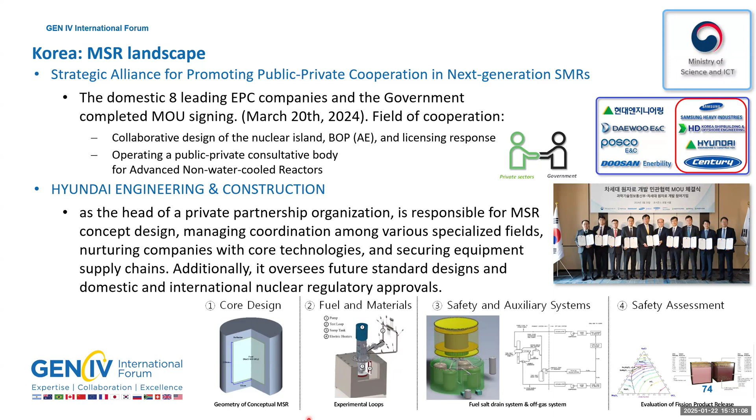The other observer is Korea. Under the new framework, Korea may become signatory, so become a member of this project. We are really looking forward to that. In 2024, the Strategic Alliance for Promoting Public-Private Cooperation was formed, signing an MOU, and Hyundai Engineering and Construction was selected as head for concept design and managing and coordinations.

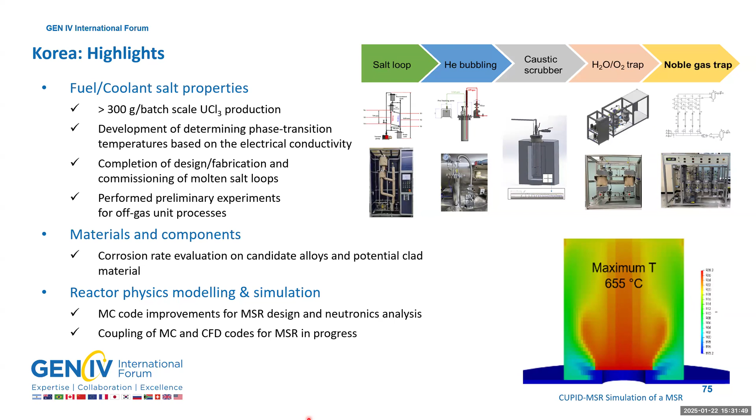Okay, that's all from my side. I'm open for your questions, but before that, I guess Patricia would like to announce the next upcoming webinars. Am I right? It's going to be Alexei, but thank you so much.